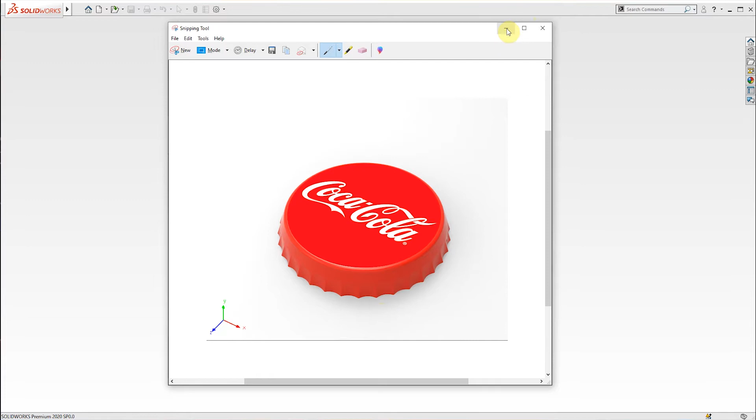Please watch this video fully because I am going to tell some tricks. This is not a 3D model, it is a sheet metal model. So let's begin. Go to File, take New, take Part, and click OK.

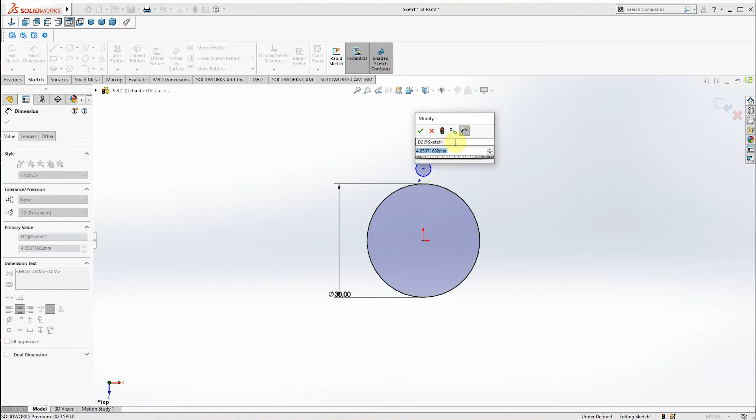Take the top plane, go to Circle and create a circle. Give a dimension 30, and take one more circle and create it here, give the diameter 6, then give the distance from here, around 17.

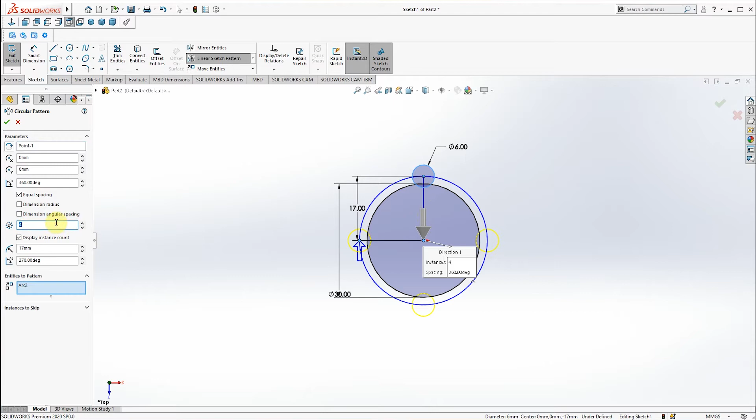After that, click the circle, then go to circular pattern and give the quantity 25, then click OK. After that, trim all the extra lines.

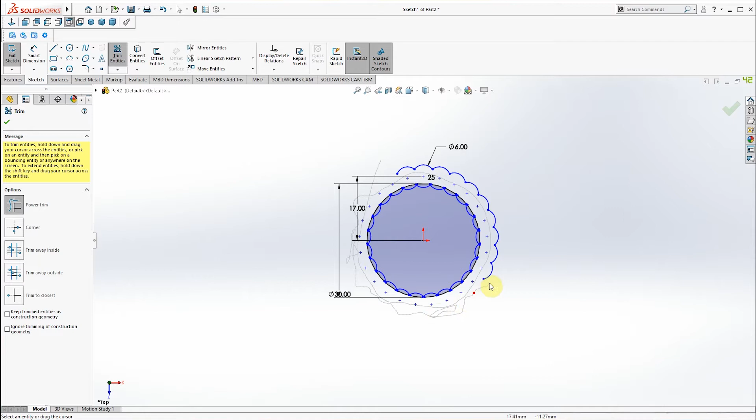All these lines you have to trim like this guys. After that you have to trim this. Now I trimmed all the extra lines.

Now you have to fix the sketch. Just select all the sketches. You have to exclude this one. Then go to Fix and click OK.

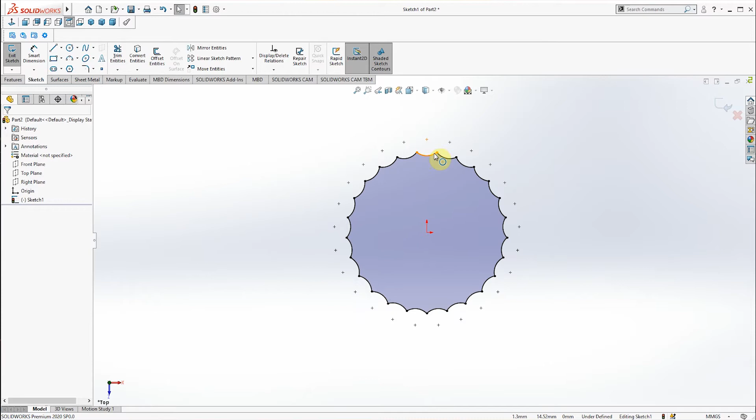Now you have to fix this one also. Just exit the sketch.

Select the top plane and go to Reference Geometry and take the plane. Create the plane above 3 mm and click OK.

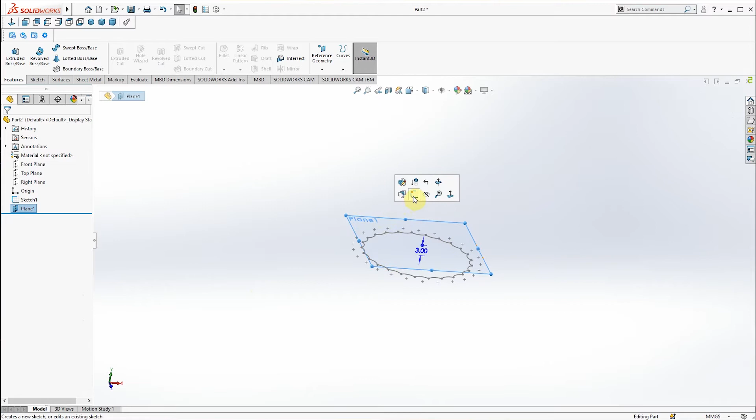After that, select that plane, create the sketch, go to normal plane, then create a circle. Its diameter 28 mm, and then exit the sketch.

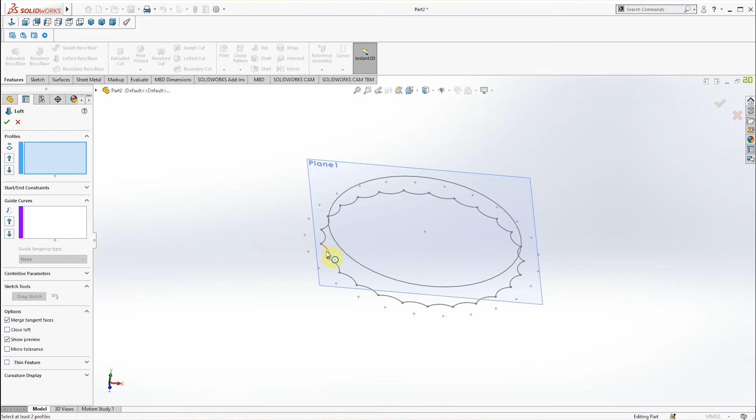Then go to lofted boss or base option. Just select the bottom sketch and then select the top circle. Then give OK.

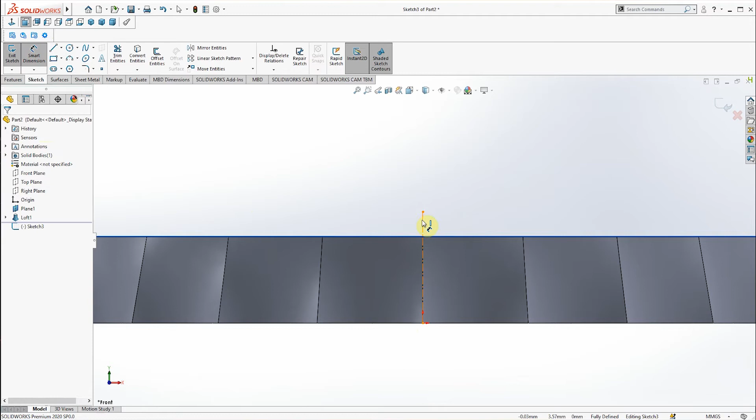After this you have to take front plane, not front plane, go to normal view. Exactly on this point you have to create one reference line, give dimension 3, and then one horizontal line, give this dimension 14, and after that one more vertical line, give this dimension 2.5 mm.

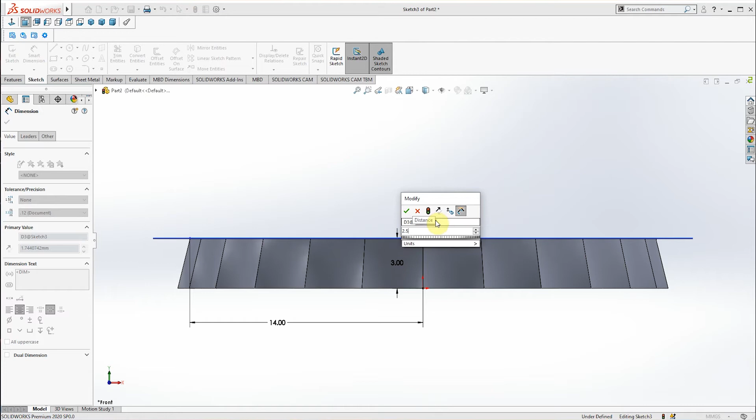After that one more horizontal line. Just join these 2 points so that you will get the collinear line here, and then go to extend option and join these 2 lines.

Go to trim this line and delete this extra point. Then just fix this line.

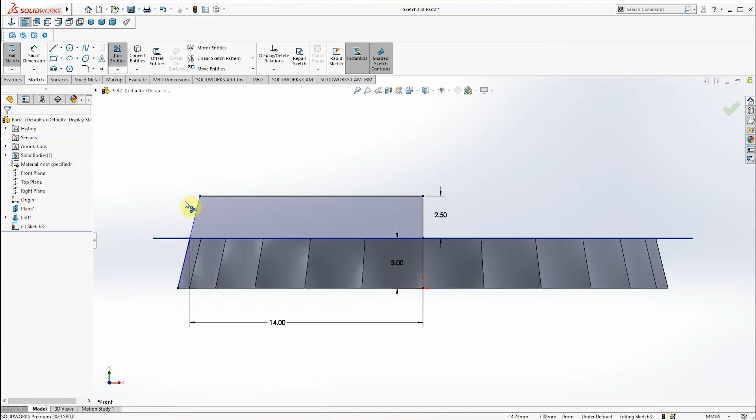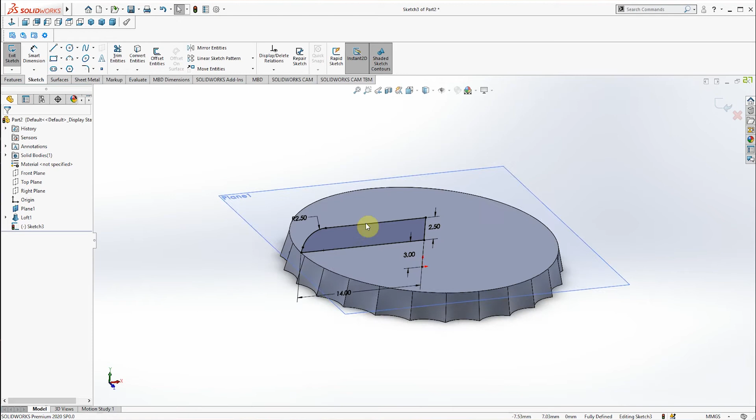Then go to fillet and select the lines, give the radius value 2.5. Just click OK. Now exit the sketch, go to revolved boss or base, select it and select the axis and click OK.

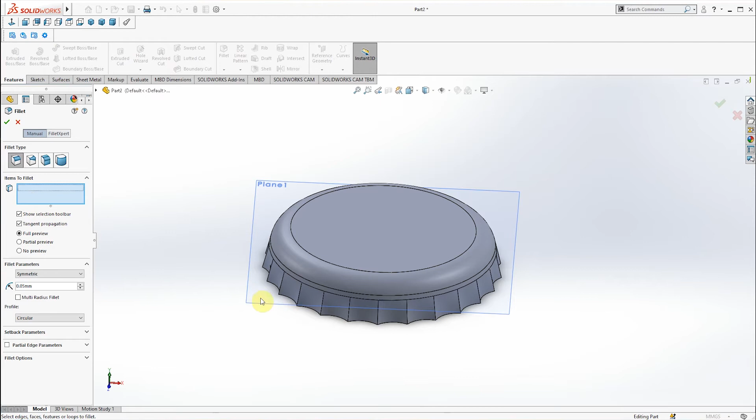Now we have to create a fillet for this. We will give the fillet for these edges. I will give the fillet value 0.05 and then select all these edges. Okay, now I selected all the edges, then just click OK.

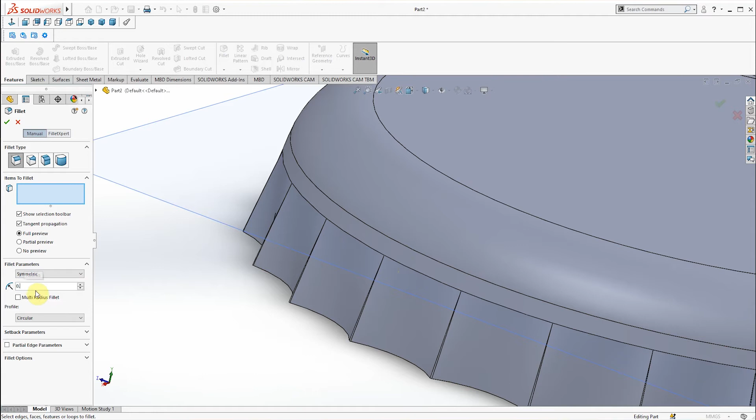After that, go to fillet again. We have to create fillets for these edges. Give the fillet value 0.3 and then select this face. You don't have to select each edge, just select this face and click OK.

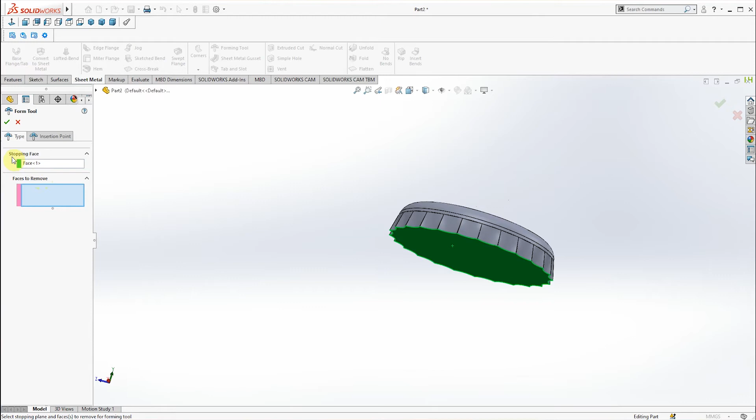Now we will hide this plane. Now we have to create a punch tool. Go to sheet metal and then select the forming tool. Just select it and select the face, meaning the stopping face, you have to select this face. Then just click OK. It is created the tool now.

Now we have to save this file in SolidWorks library. Go to save, go to C drive, program data, and go to SolidWorks, SolidWorks 2020 design library, then forming tools, embossers.

After that we will write cold drink tool. You can give any name, but I have given one general name. Then just save.

Okay, our tool is created now. It is in the design library. Just close the sketch and we will create one more part.

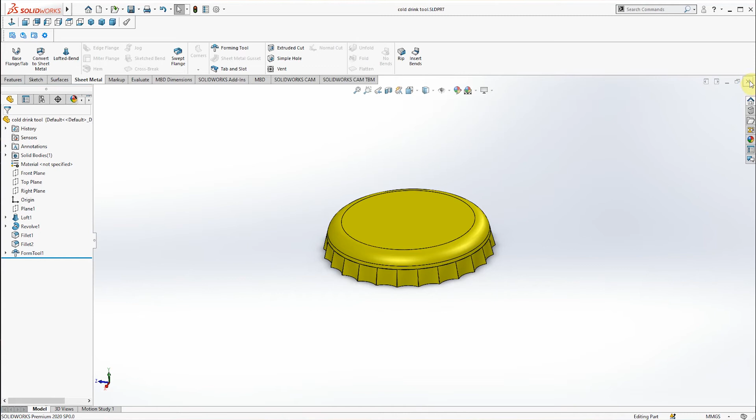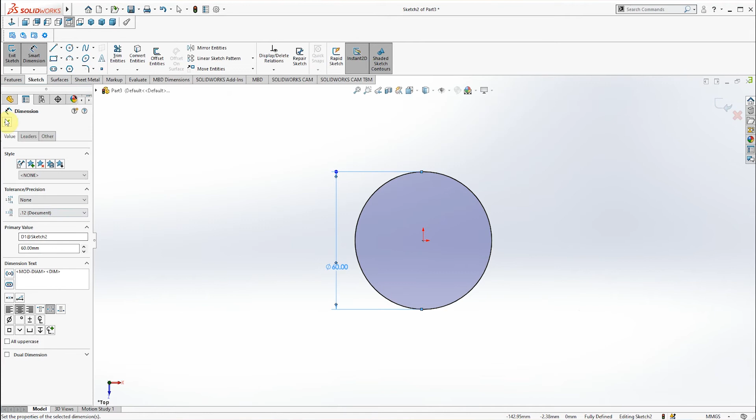Go to front plane, not front plane guys, top plane. Just create one circle, give dimension around 60. Then go to sheet metal, base flange tab. Sheet metal parameter give 0.1 mm and click OK.

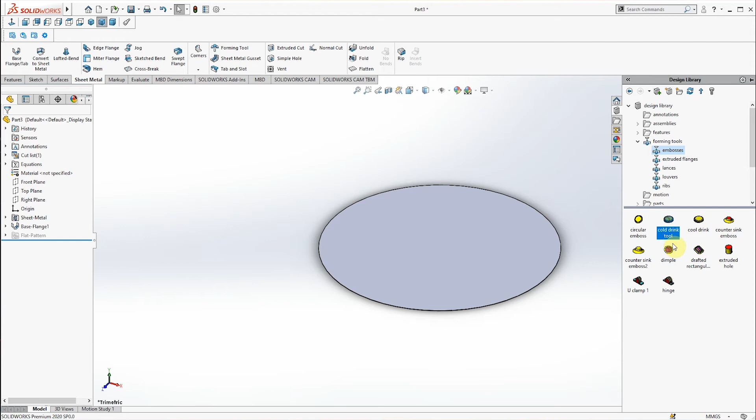After that, go to design library here, then forming tools, embosses. Here we can see our tool, cold drink tool. Just drag this on this plate.

Then just flip this tool. No need to give the position and all. Just click OK.

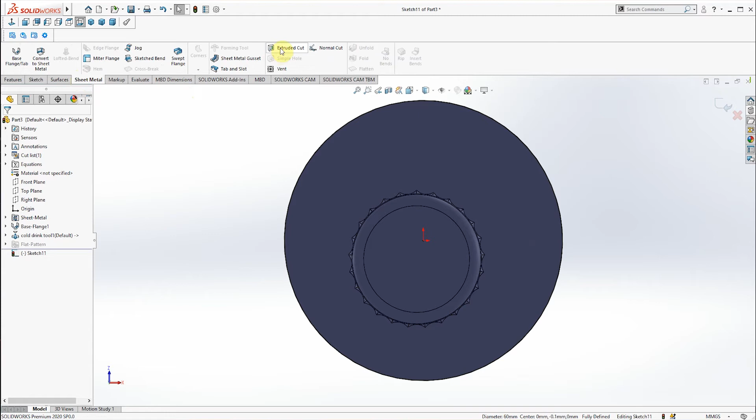After this, go to this face, create a sketch, just select the edge and convert entities, then go to sheet metal, then extruded cut. Just click link to thickness and give OK.

Okay, as you can see guys here, our cold drink cap is created now. This is the right method to model the cold drink cap, because they will make this product using punch and die. This is not a 3D model guys, this is a sheet metal model.

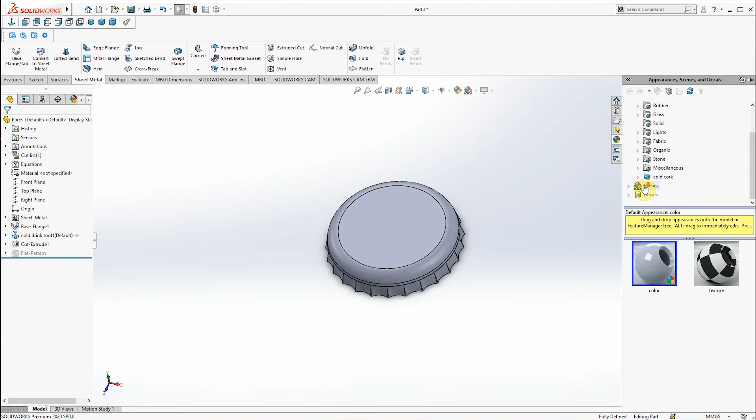Then we have to give some appearances. For that, go to tabs, make this render tools checked. So the render tools are available for me now.

Now we have to add the appearance. Go to edit decal, after that go to browse. I have this image already, so I will select this image and click OK.

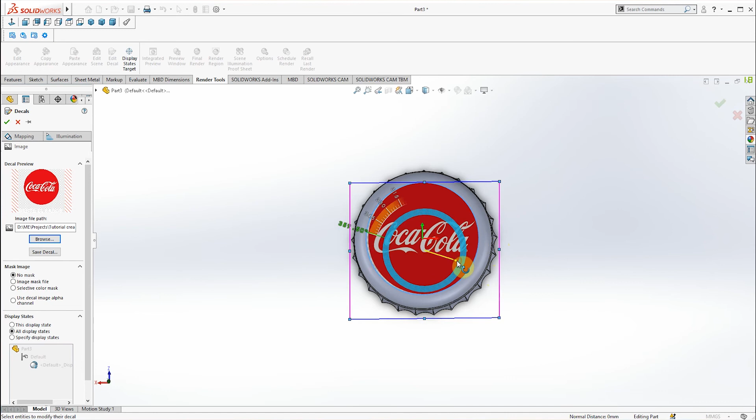Then just scale it. Scale this like this and place it wherever you want. I'm placing like this. Just increase the scale, and then I think this is enough.

Then just give OK. After that we have to give the color here also. Just go to edit appearance and then select the face, select this face.

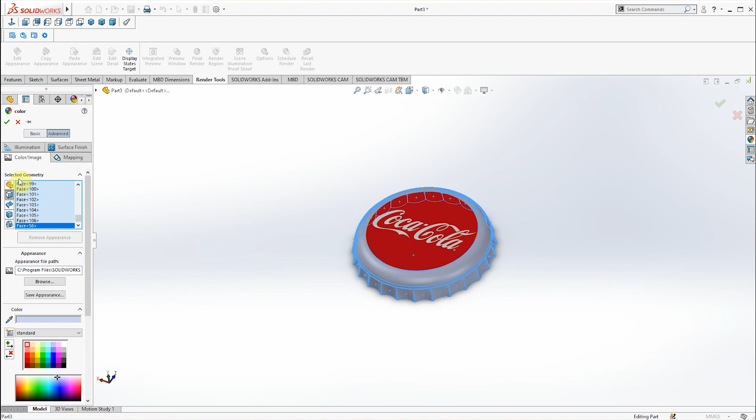After that you have to uncheck this one. Then we have to give the color. This red color we have to give.

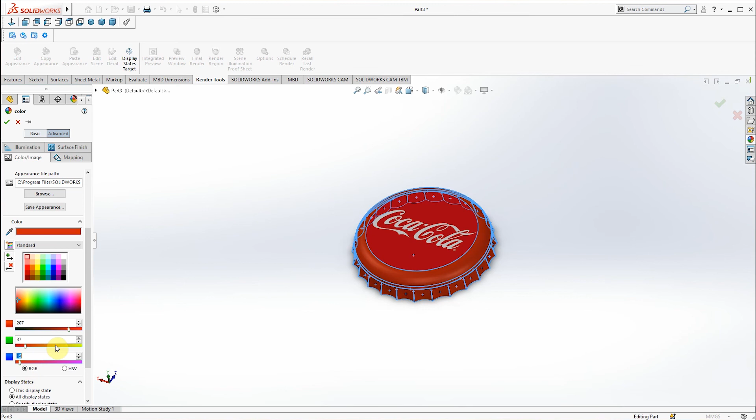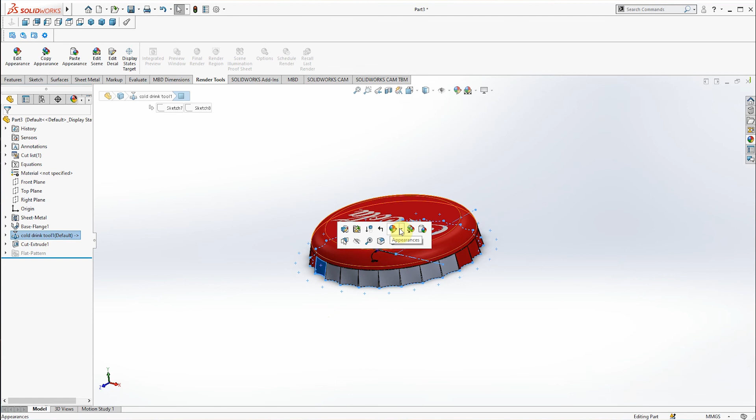This side also you have to give. For that, go to edit option again, then select all these faces. Select all these faces. And click OK.

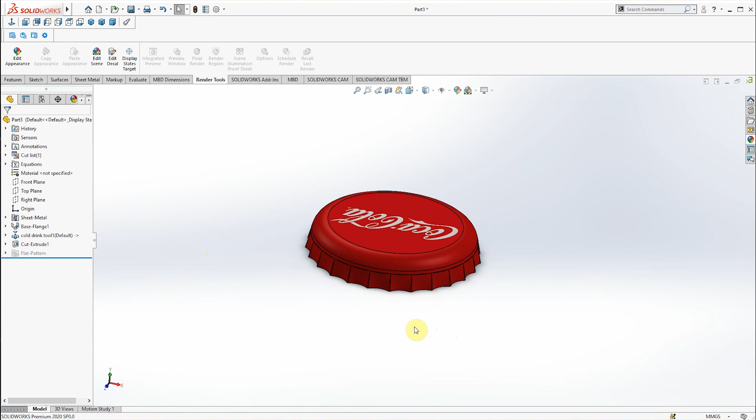Now you can see guys, this I have given the appearances. This is the right method to draw the cold drink cap.